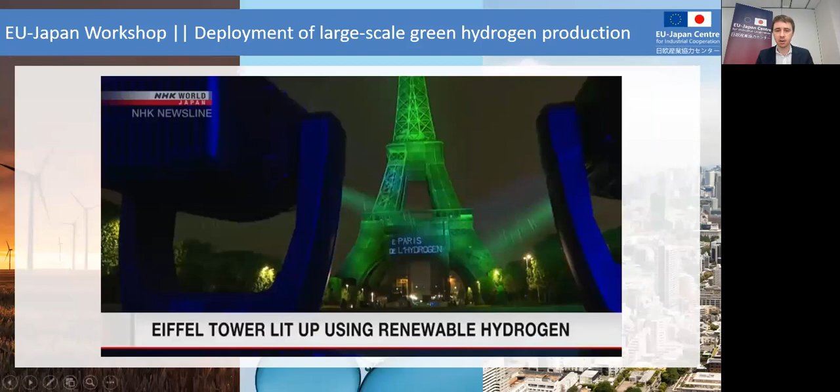Our topic today is definitely a hot topic. This week in Paris, the Eiffel Tower was illuminated in green, using electricity produced from renewable hydrogen provided by Air Liquide. And last week in Shizuoka Prefecture in Japan, a hydrogen-powered car developed by Toyota joined a 24-hour endurance race on Fuji Speedway. These two recent symbolic performances illustrate the importance that both Europe and Japan give to hydrogen on their pathway towards carbon neutrality.

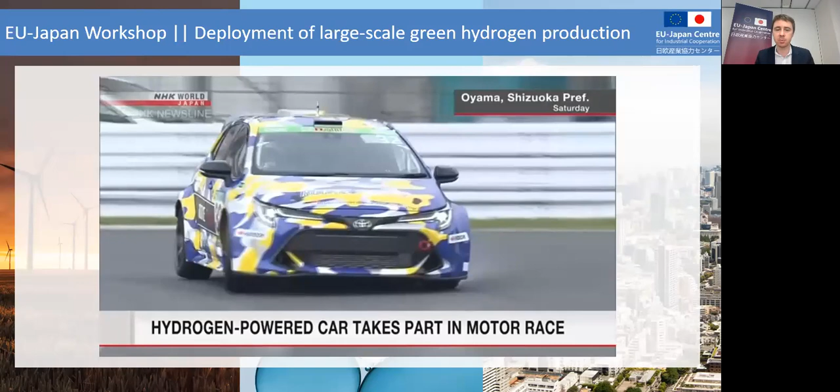They also show that hydrogen is no longer a confidential topic discussed only between experts. It's now getting out to reach the general public. As you know, hydrogen can be produced from many sources of energy. Today, 95% of the hydrogen in the world is produced from fossil sources. In our workshop today, we focus on the production of green hydrogen from renewable sources.

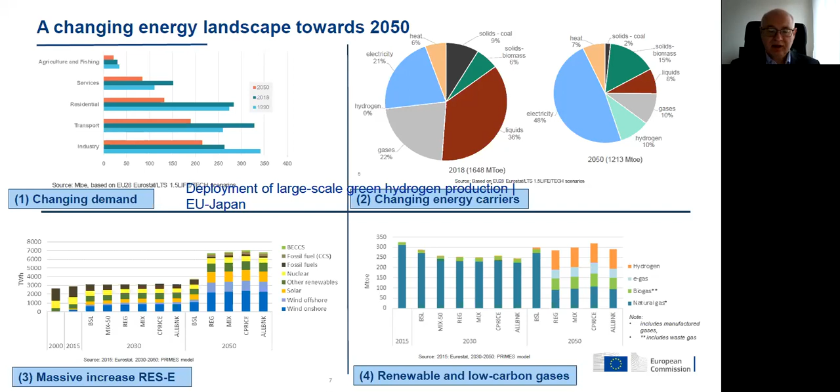Hydrogen will also be key in securing sector integration, but also, in the first instance, in securing large-scale storage of renewables. So it's a key priority, and our analysis makes clear that hydrogen and electrochemical storage will de facto become the main solutions for the future. We still have pumped hydro and will continue to in Europe, as capacities are limited, so gradually chemical and electrochemical batteries and hydrogen will play a growing role.

In some of the scenarios, hydrogen will play the most important role, and will need to move towards hundreds of gigawatts of installed capacity, both for storage and for securing the electricity grid, while at the same time delivering decarbonization services to other parts of the economy.

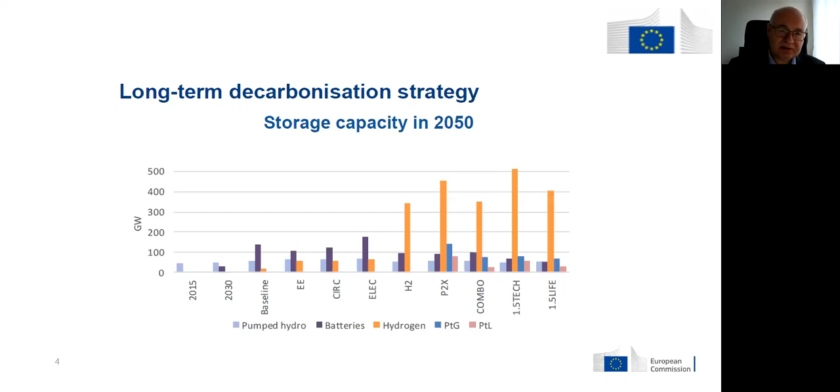In this context, we came in support of the implementation of the Green Deal objectives with the concept of energy system integration, a strategy last year followed by the hydrogen strategy, which includes an investment agenda, and looks at how to boost demand and scale up production, to develop hydrogen infrastructure.

We also looked at research and innovation. At the international dimension, the Hydrogen Alliance came at the same time, bringing many actors together to succeed in the implementation of these efforts. I will try to be quick on those.

What is important to bear in mind for all participants, also those not from Europe: we have concrete targets for 2024 of 6 gigawatts of renewable hydrogen production through electrolyzers, 40 gigawatts by 2030, and the strategy also acknowledges potential for another 40 gigawatts in the neighborhood of Europe.

So the aim is, towards 2050, to really scale up and decarbonize all sectors, making a place also for synthetic fuels. In this journey, we need first of all to replace the existing hydrogen production, which currently, as we all know, is 95% fossil fuel based without any CCS.

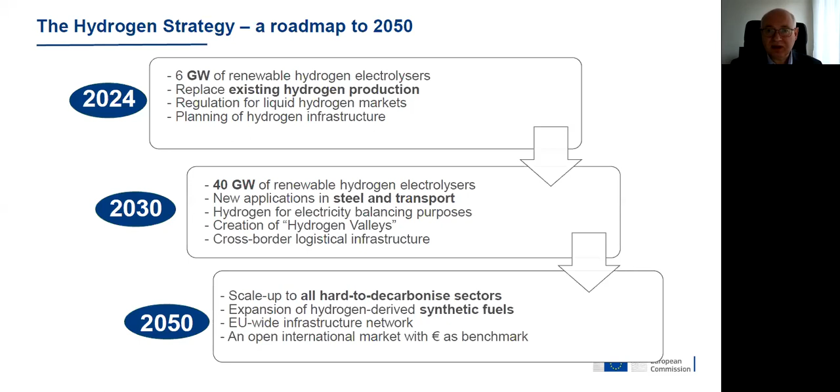But gradually we need more and more renewable capacities installed, and renewable hydrogen in particular to support heavy duty transport, to support the steel industry becoming green steel, and also to launch more and more hydrogen valleys across Europe, what we have started in Europe, to become a norm and support decarbonization everywhere.

Next slide, please. But as I said, it's very much an investment agenda.

You see that to invest 24 to 42 billion euros in electrolyzers needs to be accompanied, for the 40 gigawatts by 2030, by an additional 80 to 120 gigawatts of renewables, for which we need to invest 220 to 340 billion euros. All this is very important to drive economic recovery and modernization of the economy, and a more sustainable economy towards 2050. This is, I think, essential.

And the work has to be done also on the end-use sectors and on the infrastructure, whether transport or storage of hydrogen as well.

Therefore, we have launched the Alliance, and the Alliance has the objective of defining project pipelines for hydrogen in Europe. There are more than 1,000 stakeholders involved, and 6 round tables covering the whole value chain, from energy production, transport and distribution, mobility, buildings, industrial applications. The first project pipeline will be communicated at the forum on 17-18 of June.

We work with all the industries in this, and on the concept of partnership we have developed initially in research and innovation in the joint undertaking with Hydrogen Europe, but extended to all, and Jörg will tell you more about this, expanded afterwards to all the sectors and actors contributing to the value chain for hydrogen for the economy. And to materialize this, we have a number of actions and key tools.

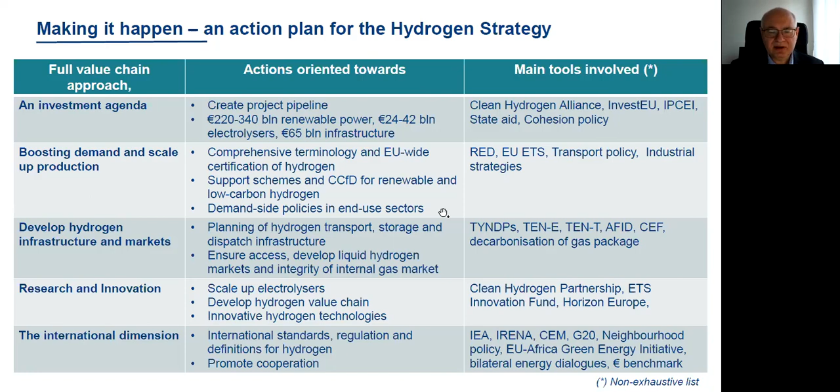The international dimension is key. It's not only about standards and regulations, but also promoting cooperation. Here, next slide, I will refer a bit more on this. It's clear we have a structured dialogue with all the OECD and developing countries, and Japan is the very best example, I could say, in this area.

We need research and demonstration to continue, and there's a mission innovation here with the concept of hydrogen valleys and the platform being launched. The International Partnership for Hydrogen Economy on codes and standards, but not only—we are working now, also together with Japan, in a multilateral context as well, for the methodologies for greenhouse gas emission calculations, because if we want to develop global markets and trade in hydrogen, we need to know what we count.

And how we measure and quantify renewable and low carbon hydrogen. The Clean Energy Ministerial Hydrogen Initiative is also an area in which, again, we cooperate also with Japan, but not only with Netherlands, with the United States and Canada. And we will launch next week, and very happy to announce that we'll launch a Global Ports Coalition on this occasion.

So again, the Eastern Partnership and the Southern Partnership and the Green Energy Initiative with Africa are very important, both for investment perspective and for the investment partnership we want to develop with all these regions and countries, but also to support them in tapping the potential for renewables and for renewable hydrogen production and use, but also export in global markets and to Europe.

So with this as an introduction, I thank you very much, and back to you and to Toshi.

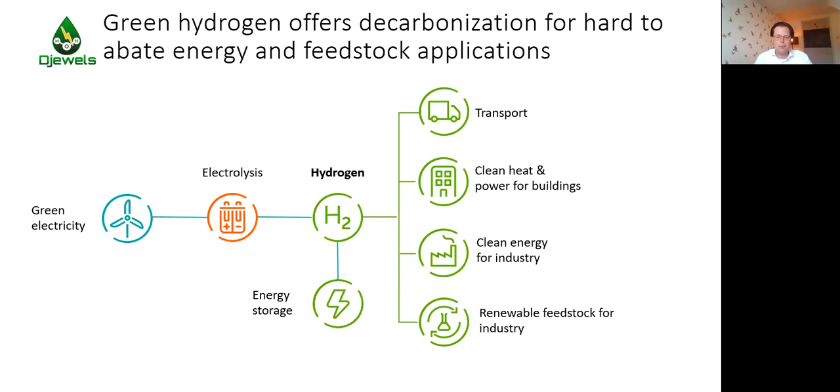Now, obviously, green hydrogen, as you all are aware, offers great opportunities for this decarbonization, especially in the hard-to-abate energy and feedstock applications. We have focused really on the electrolysis and the renewable feedstock, as we see the industry, particularly the chemical industry, as the starting point to reach scale, because scale is what we all need to bring costs down.

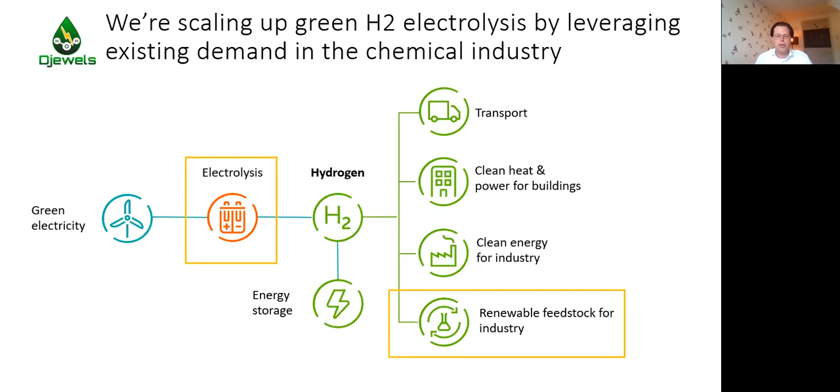That's why Nobian, together with partners mentioned on this slide, set up the Djewels project, really to go set a complete value chain from renewable power up to renewable methanol. And we have all the partners included in the project really to make this first step happen.

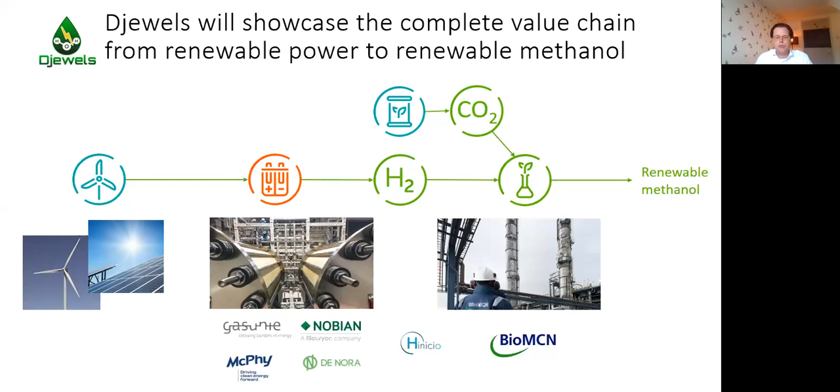Because with Djewels, we set a very important first step. It is a 20 megawatt water electrolyzer, which is not yet at the scale that we want to be, but it's very important because this is the scale where you move out of containerized solutions and you move into industrial scale factory type solutions. We use state-of-the-art high current density pressurized alkaline technology, really a next step in technology to further bring costs down and enable further scale up.

We work together with the Dutch gas transport system operator Gasunie, with chemical company OCI BioMCN, Groningen Seaports, the local harbor authority that will support on infrastructure, McPhy and De Nora, European technology providers, and Hinicio, that is supporting on the certification of the hydrogen.

So really making sure, together with our partners, that we take the renewable attributes from the renewable power into the product of our customer, OCI BioMCN. We have much support, as mentioned, to not only bring this first project on the ground, but also enable the lessons dissemination from this project to help further scale up.

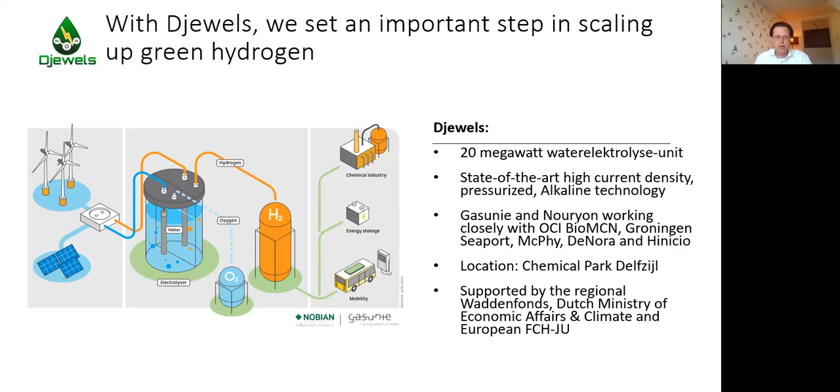We are located in the chemical park Delfzijl, and it's an important location because while we only start with 20 megawatt, the potential of demand in this chemical park is over 1 gigawatt. So we are able to scale up here.

I think a nice add-on to share in this European-Japan cooperation is mentioning that we operate already a 30 megawatt chlor-alkali production, which is using Asahi Kasei technology. And actually, recently, together with a partner, Asahi Kasei, we introduced the newest generation of membranes into this facility. So I think also a showcase of European-Japanese cooperation we actually implement in Delfzijl. But the potential of just the chemical park Delfzijl is already above 1 gigawatt.

And that's also what we're trying to leverage in this from Djewels. While we get the leverage, while we get the scale of electrolysis, green hydrogen production from the chemical industry, we leverage that scale for multiple applications, both in mobility, household applications such as heating, and transportation, and also use it for energy storage.

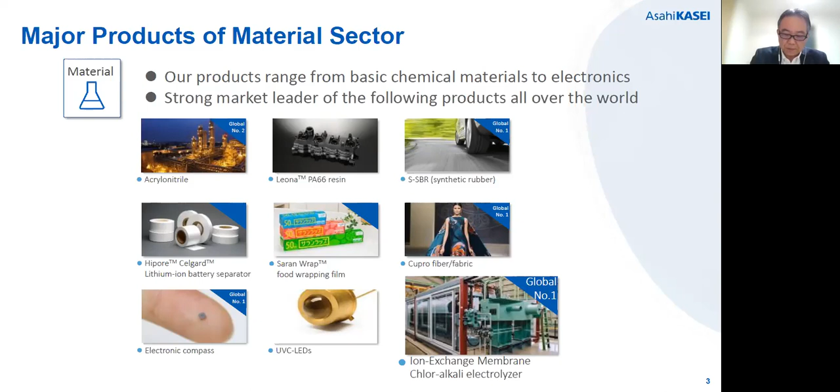This shows the major products in our materials sector. We have chemical materials up to electronics, and a wide range of products including monomer, polymer, films, fibers, and semiconductors. On the right-hand side, we are the global number 1 chlor-alkali electrolyzer, and we also operate in the ion exchange membrane business.

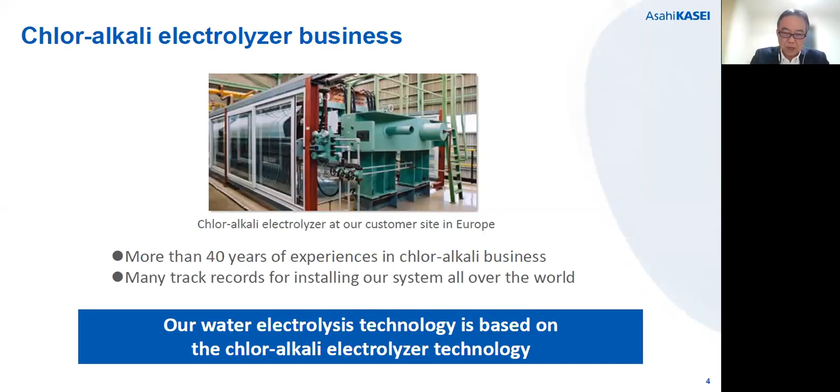This shows the specific chlor-alkali electrolyzer business. The photo shows the electrolyzer set at a European customer. Using this technology, in 1975 we started this business focusing on chlor-alkali electrolyzer. Over 40 years we have gained experience, and we are still running this business based on that experience. We have many customers and an actual track record. This water electrolyzer is really based on this original chlor-alkali electrolyzer.

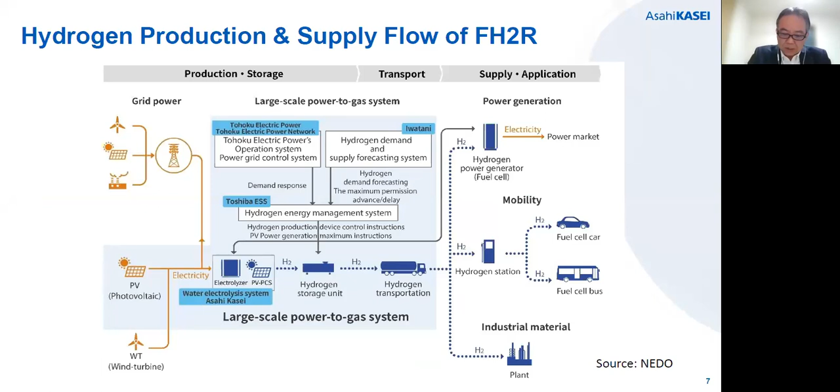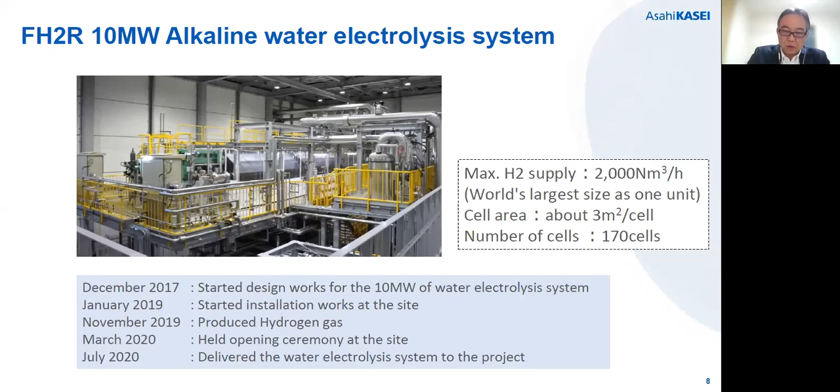This is the 10 megawatt alkaline water electrolysis system set up in the FH2R project. The biggest supply will be 2,000 normal cubic meters per hour. The cell area is about 3 square meters per cell, and the number of cells is 170. We are actually evaluating this equipment.

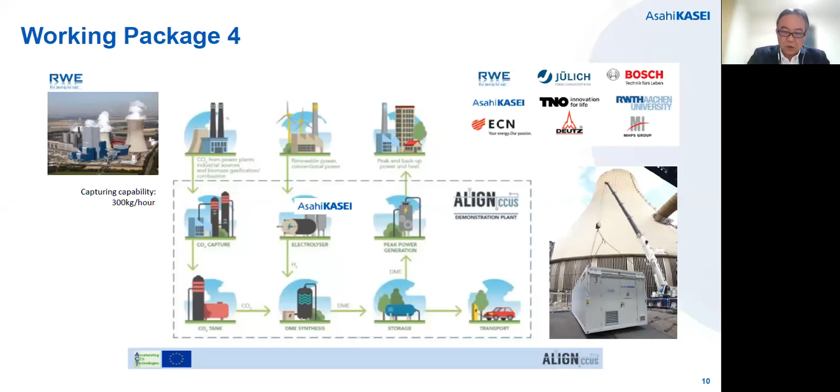This is the detail of work package 4. From power generation, CO2 will be collected. We use a water electrolyzer to synthesize H2, and we react this with CO2 so that we can produce OME, which can be utilized as fuel. This can be used for transportation and further power generation. By doing this, we'll be able to contribute to reducing CO2 emissions.

Lastly, this is how we plan to contribute to sustainable society. Since we are a chemical company, we would like to convert hydrogen into green chemicals. A water electrolyzer can be used to generate hydrogen, and this hydrogen can be converted to ammonia or methanol, possibly utilizing CCU in this process. By converting hydrogen to different materials, we can apply them to fertilizers, specialty chemicals and fuels, synthetic rubber, plastic, fiber and textiles, and coating materials. There are all these different kinds of applications possible. With this vision, we want to contribute to a sustainable society, a sustainable world.

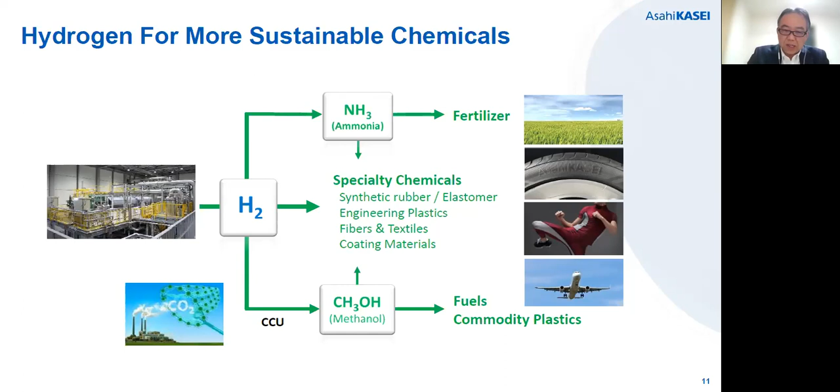Thank you very much. I'm very pleased to hear all that, and this shows also already the potential of collaboration between European and Japanese companies.

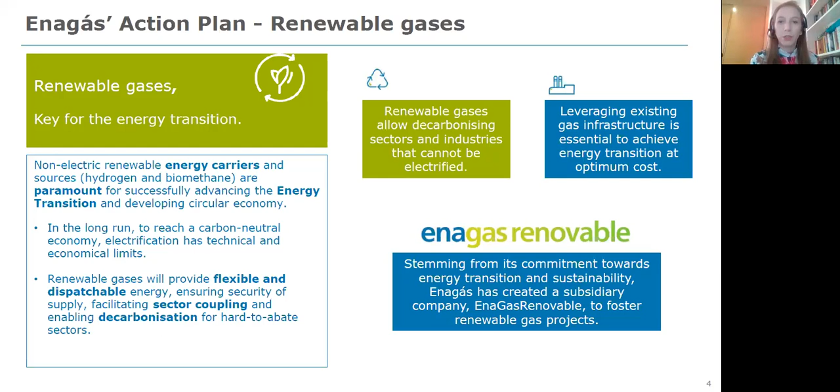According to this strong commitment that Enagás has with decarbonization and the energy transition, we have created a subsidiary company, called Enagás Renewable, to foster and boost these renewable gas projects. Next slide, please.

This Enagás Renewable company is boosting renewable gas projects, mainly focused on hydrogen and biomethane. From the point of view of hydrogen, we are mainly interested in green hydrogen production by renewable energy sources—photovoltaic, wind, onshore, offshore, etc. In our projects, we usually include several end uses of this green hydrogen: mobility, producing electricity for industry as feedstock, and of course for energy use, not only electricity but also heat, and for the residential and commercial sector.

Related to biomethane, we are more focused on the upgrading stage. From biogas, we participate in projects upgrading this biogas in order to obtain biomethane, which we then inject into the natural gas grid and use to move natural gas through the network. Next slide, please.

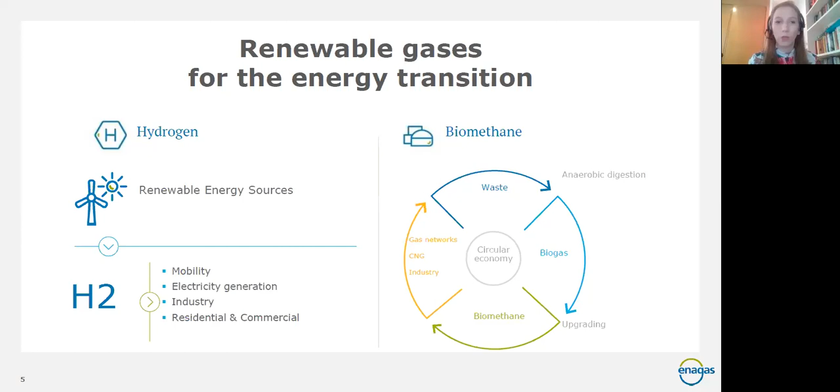Which kind of projects do we develop regarding these renewable gases? I am going to focus on hydrogen because I think that is today's topic. We are promoting large-scale projects for the decarbonization of economic sectors, focused on regions impaired by the energy transition, and we are retrofitting and upscaling the national gas network, blending with natural gas, as well as developing dedicated hydrogen backbones towards Europe. In that sense, we are promoting the IPCEI Green Crane, which I will explain a little in the following slides.

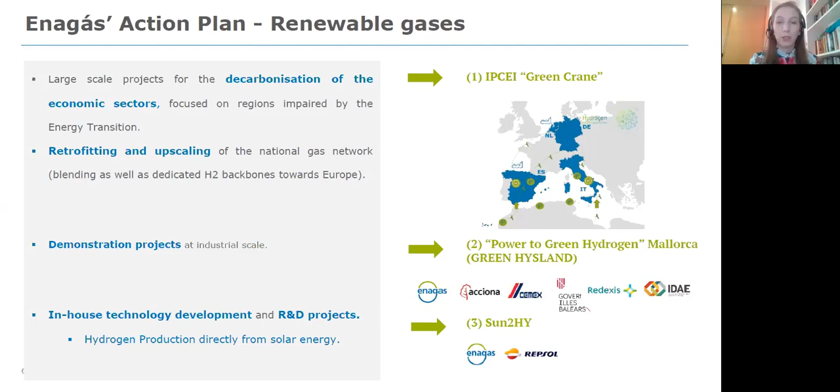The second kind of projects we develop are demonstration projects at industrial scale. We are talking about, for example, the project Green Hysland, which I am going to talk about a little bit later on. And of course, we are developing R&D projects in order to develop in-house technology deployment related to hydrogen. For example, we are developing sun-to-hydrogen projects, in which we develop technology to produce hydrogen directly from solar energy through photo-electrocatalysis. Next slide, please.

Related to the first project I mentioned is the hydrogen IPCEI Green Crane initiative. IPCEI stands for Important Project of Common European Interest. In that sense, we are developing the Green Crane initiative. It's not a single project; it's an umbrella which includes several projects.

As you see in the picture, there are 3 routes. The idea is to develop south to north green hydrogen routes. We are working with partners in other countries to connect competitive green hydrogen with demand centers. The idea is to pave the way for future European cross-border and import routes. We would like to boost local hydrogen demand in regional hubs, and the final goal is to decarbonize end-use sectors with this green hydrogen.

Here you have more information about this green hydrogen IPCEI Green Crane initiative. The western route is led by Enagás. There are more than 65 partners involved in this initiative. In the past, it was called Green Spider. In this western route, we are going to invest up to 6 billion euros. The goal is to produce 3.3 gigawatts of new renewable energies and 1 gigawatt of green hydrogen, which we will use in different sectors, including industry, refineries, steel, e-fuels, and the chemical industry.

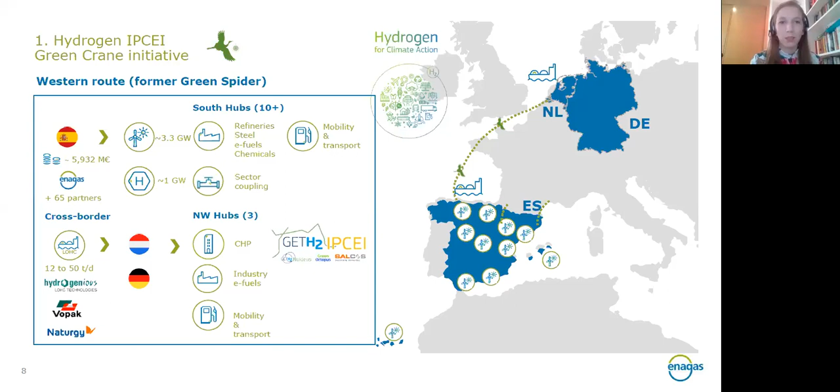Focusing on Spain, here are the hubs that have already been announced, although we are working on the development of hydrogen projects in almost all regions in Spain. Hub number 1, which is Mallorca, will be discussed later. All of them include the production of green hydrogen from renewable energies and the use of this hydrogen in multiple applications, such as industry, mobility, and grid injections.

Here you have 8 examples of the hubs that have been announced. But as I mentioned before, we are really working on several projects in almost every region in Spain.

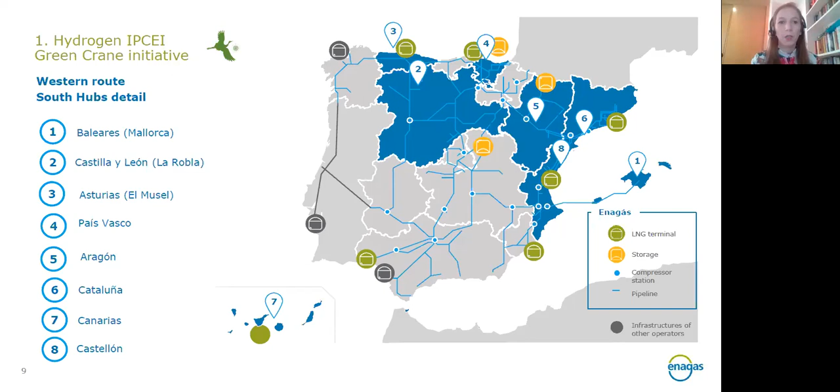Just some information about the R&D project I mentioned before, which is the Sun to Hy project. The idea is that solar radiation is converted directly into hydrogen without external electricity, meaning low cost materials and high availability. We will increase efficiency and reduce cost compared with the traditional PV electrolyzer plant.

Next is the project Green Hysland, a European project funded by the Fuel Cell and Hydrogen Joint Undertaking. We signed the grant agreement in December 2020, and it's a 5-year project. The idea is to develop a hydrogen ecosystem on the island of Mallorca, in the Balearic Islands, using this green hydrogen for multiple applications.

How this project started: in December 2018, CEMEX, one of the partners promoting this project and active in the industrial cement sector, announced the closure of its cement production plant located in Lloseta, Mallorca. From that moment, work began on defining projects that would allow the reindustrialization of its activity in Mallorca. This is part of an agreement between the Spanish Ministry of Industry, Trade and Tourism, the Balearic government, and companies represented here: Enagás, Acciona, CEMEX, and Redexis, in order to reindustrialize Lloseta.

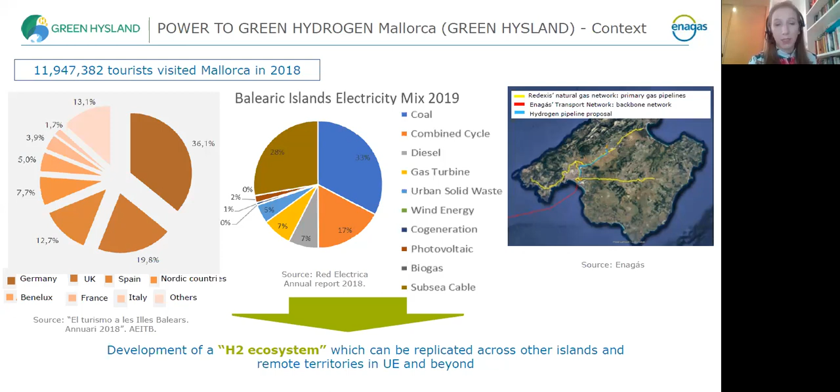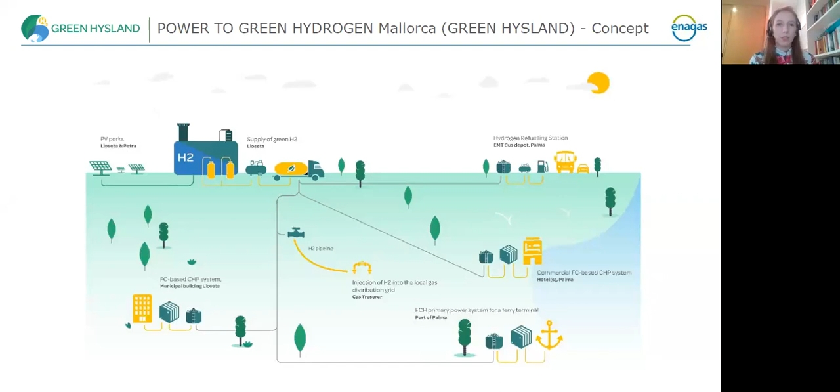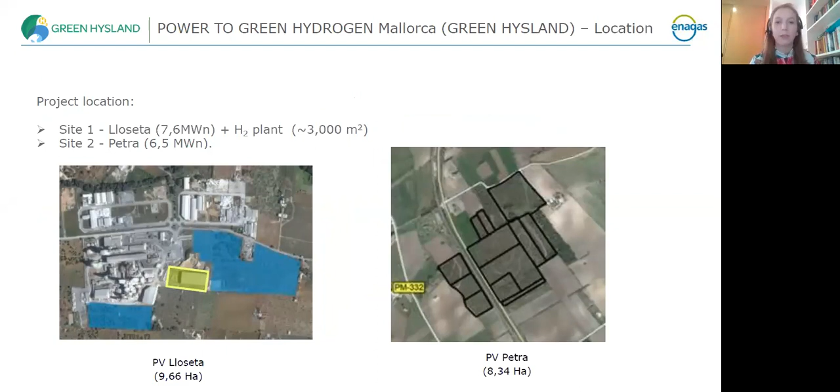Next slide, please. Here's an example of the location within the CEMEX land. In yellow, you can see the hydrogen production plant, and in blue, on the left is the PV Lloseta plant and on the right the PV Petra plant. We are going to develop two PV plants to obtain green electricity for the hydrogen production.

Next slide, please. What are the key figures of the project? By the end of the project, we hope to avoid more than 21,000 tons per year of emissions. We are going to develop new direct and indirect employment ecosystems associated with hydrogen, and a sustainable large-scale island-based hydrogen hub. This is very important for us — we are not looking for small projects to prove the concept, because we think the concept is already justified and proved. We would like to develop sustainable and scalable hydrogen ecosystems in Spain, throughout Europe, and throughout the world.

Inside the project, we are also going to develop a long-term roadmap to lay the path for the local and regional-based economy towards 2050. There are 5 partners who will help us replicate this ecosystem in their own territories, and the total investment is about 50 million euros. Next slide, please.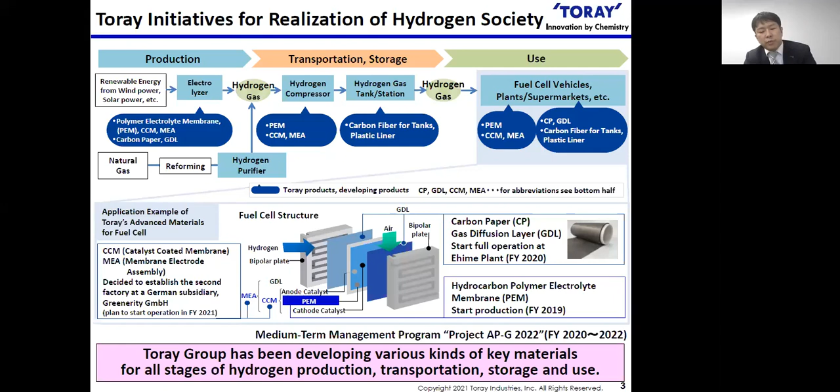Here is our German subsidiary company Greenerity's initiative in the power-to-gas megawatt class PEM electrolyzer demonstration project in EU. Toray acquired Greenerity, a former SolviCore, in 2015, based in Hanau-Alzenau near Frankfurt, Germany. Toray Group's Greenerity has been leading the demonstration project of the world's most compact megawatt class PEM electrolyzer stack since 2015 in Hamburg, Reitbrook, based on Greenerity's CCM technologies. Today, Toray Group has promoted the initiative toward the realization of hydrogen society from early on for the proceeding EU market as for the electrolyzer and green hydrogen production.

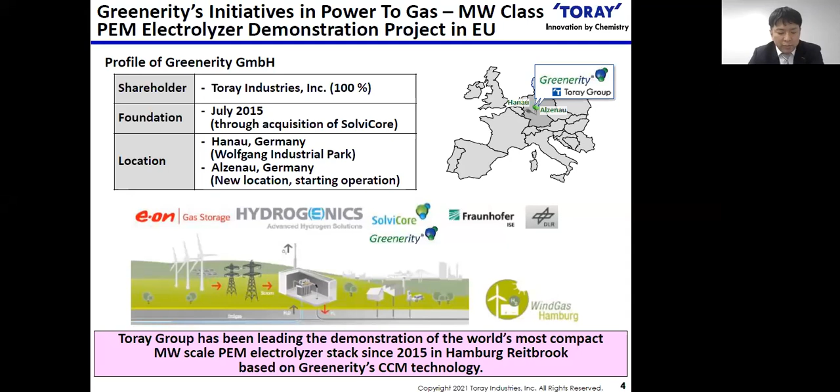Here is the principle of PEM electrochemical devices, including the electrolyzer, hydrogen compressor, and fuel cell. As you may know, all devices have almost the same cell configuration, including the PEM, catalyst, and GDL. Membrane and MEA is the common key material for fuel cell, compressor, and electrolyzer.

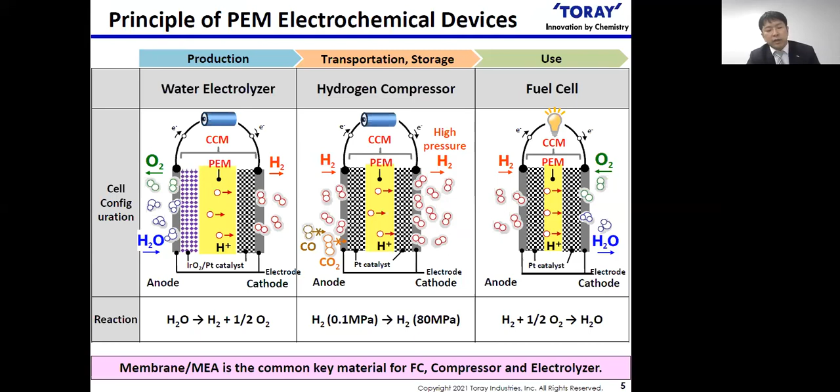This slide shows Japan's green growth strategy through achieving carbon neutrality in 2050, published by METI. As we discussed in the Japan Hydrogen Fuel Cell Strategy Council, in order to reduce CO2 emissions, not only renewable equalization and expansion, but also green hydrogen utilization in non-electricity, so-called sector coupling, would be of essential importance. Therefore, we consider that green hydrogen production by electrolyzer is a kind of core technology toward carbon neutrality.

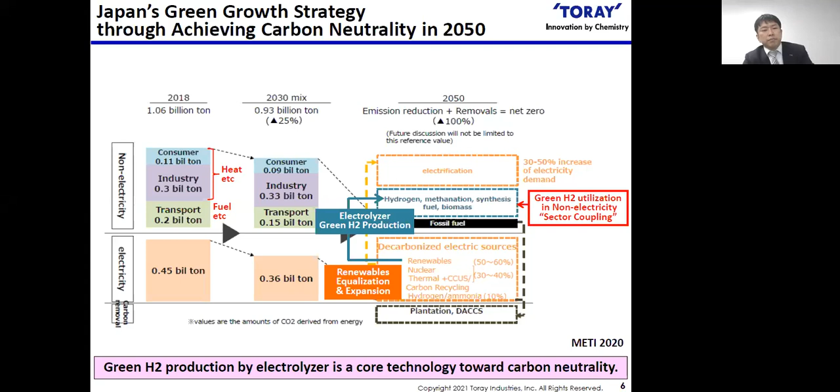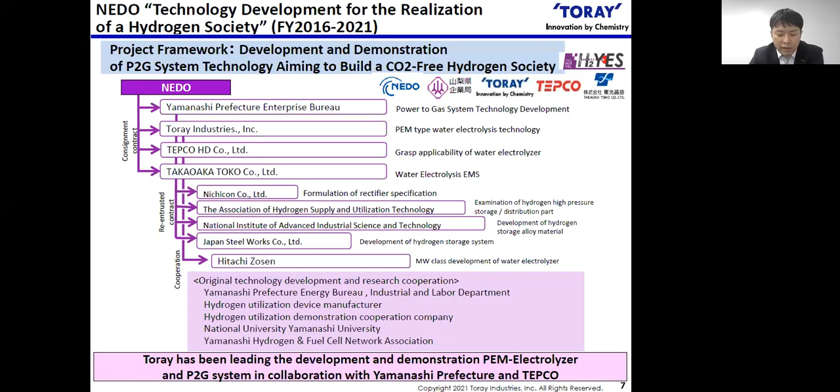This is the NEDO project framework, development and demonstration of P2G system technology, aiming to build a CO2-free hydrogen society since 2016. After Toray's joint project on electrolyzer R&D, Toray has been leading the development and demonstration of PEM electrolyzer and P2G system in collaboration with Yamanashi Prefecture and TEPCO, Tokyo Electric Power Company, in Japan as well.

This is the overview of the Yamanashi NEDO P2G project. We are promoting consistent demonstration projects from green hydrogen production to utilization in the real hydrogen society of Yamanashi Prefecture, including the hydrogen boiler for the semiconductor factory, as well as a stationary P2G for the supermarket. In this project, Toray has been leading the development and demonstration of Japan's first megawatt class PEM electrolyzer in collaboration with Hitachi Zosen.

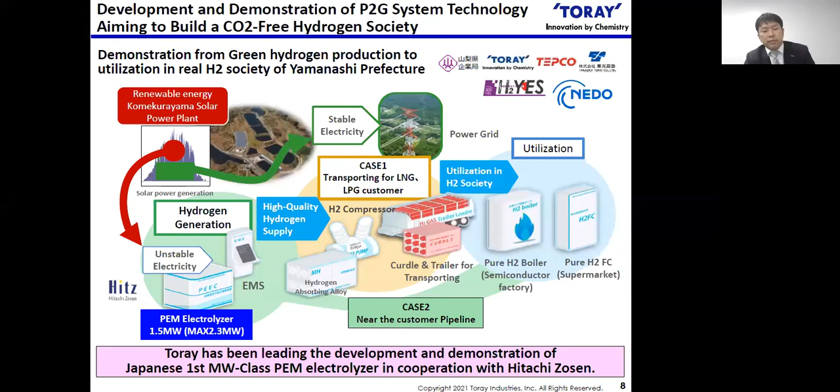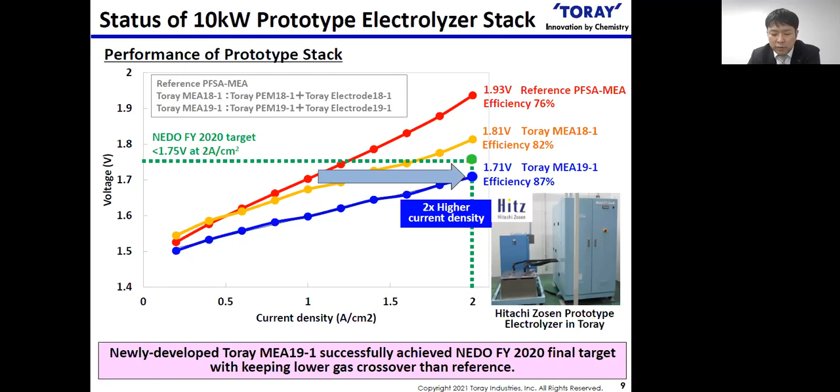This is the development status of the 10 kilowatt Hitachi Zosen prototype electrolyzer stack, which was installed in the Toray Shiga plant. As you can see here, newly developed Toray MEA, shown as the blue line, successfully achieved the fiscal year 2020 final target shown in green, while keeping lower gas crossover than the PFSA reference. In comparison with the reference PFSA MEA as the red line, Toray MEA 19-1 achieved twice higher current density at the same voltage, which will be able to contribute to higher efficiency system and cost reduction of stack system and green hydrogen.

This is the field demonstration status of a large area prototype electrolyzer stack in Komekurayama, Yamanashi Prefecture. Based on the Toray membrane MEA technology shown in the previous slide, Toray has been promoting the development and demonstration of a large area prototype PEM electrolyzer stack in cooperation with Hitachi Zosen.

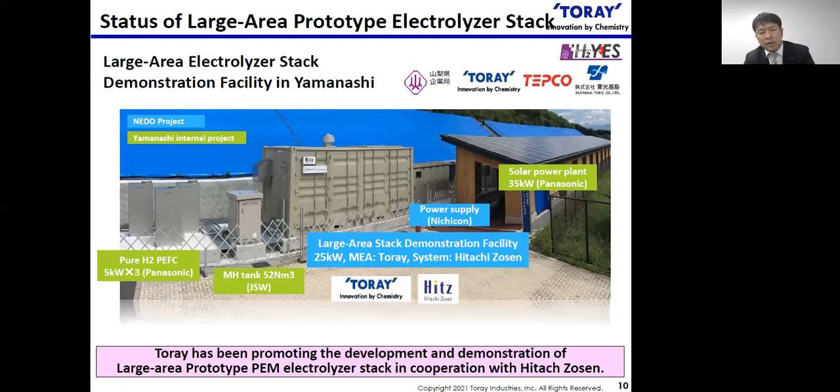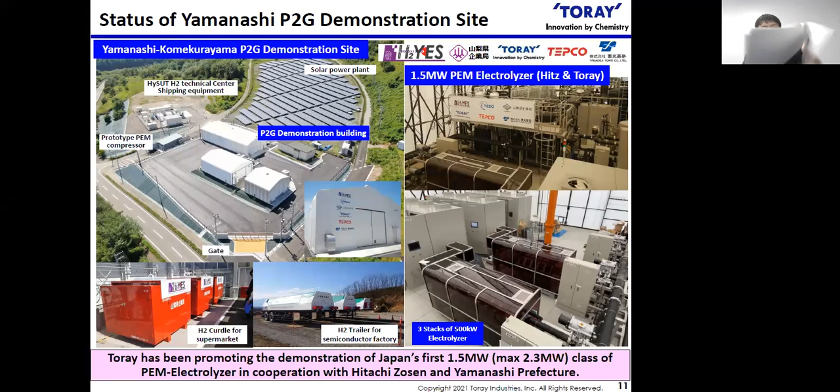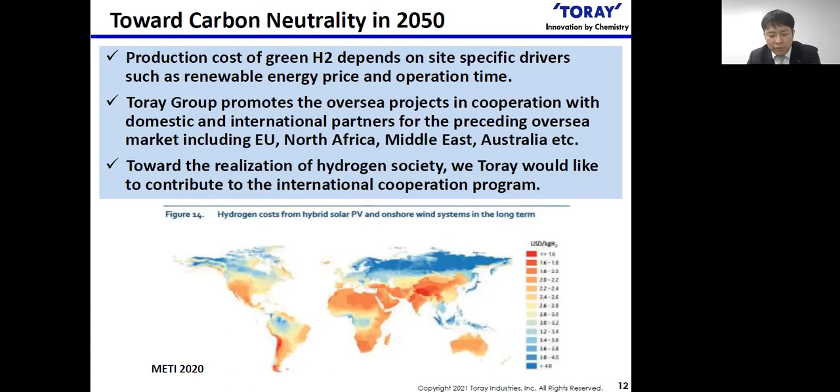There was a question for you, if you plan to utilize steam electrolysis, or PEM electrolyzer.

Okay, I think we are a bit running out of time, but this panel was very interesting and very relevant. I should point out that indeed the hydrogen strategy in Europe is very clearly focused on renewable hydrogen, so the carbon footprint is important. The taxonomy will play an important role in steering, and the levels agreed there will play a very important role in steering investments and public support in hydrogen and renewable hydrogen projects.

So this alliance will also pay due attention to the project pipelines which will support the hydrogen strategy implementation. There are already good examples of cooperation with Japan.

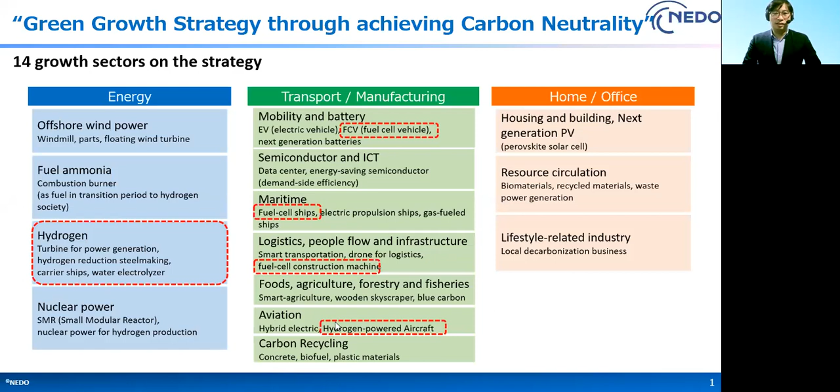Okay, next I will talk about current activity in hydrogen fuel cell. We conducted several projects from hydrogen production, transportation, storage, and utilization, basic research, applied research, demonstration, etc. Today I will bring some information about our direction.

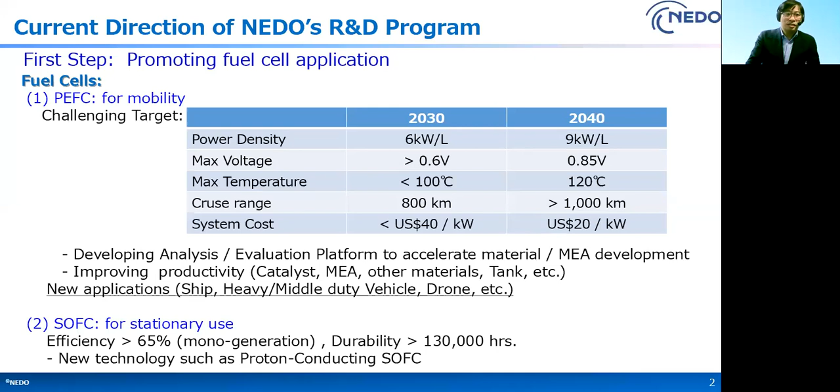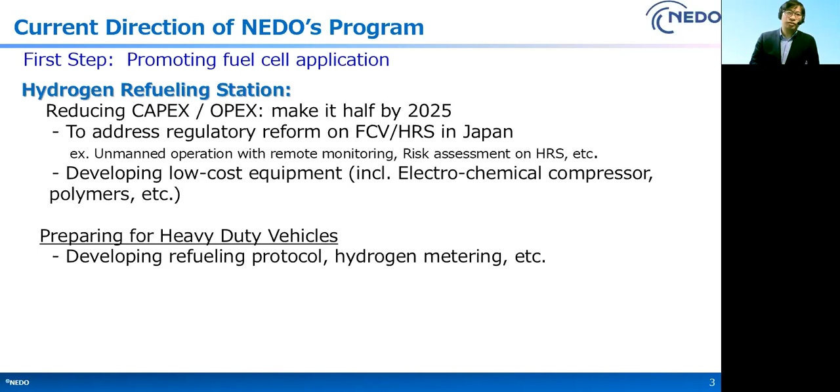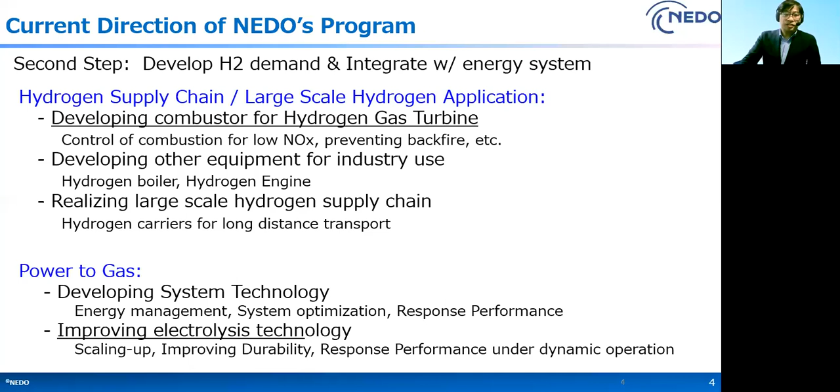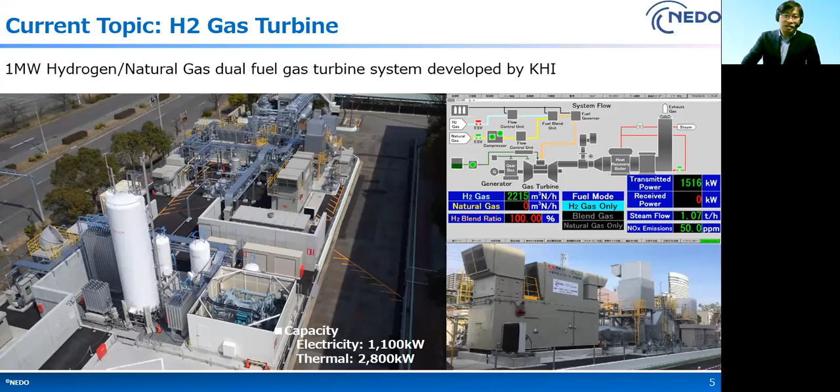We are now running over 3 years, and we already succeeded in 100% hydrogen operation. Our next challenge is improving the efficiency of the gas turbines.

As I mentioned, we are conducting two types of hydrogen carrier. One is liquefied hydrogen, and we already developed the world's smallest but world's first hydrogen tanker, shown in the photo on your left.

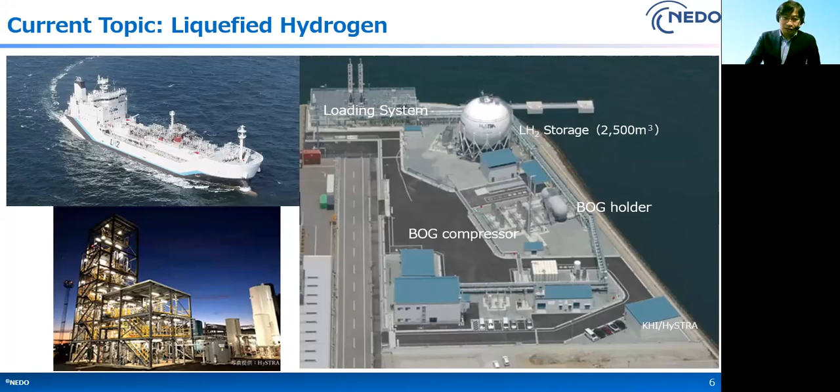We are also developing liquefied hydrogen handling equipment at the port, like a loading and unloading system and large-scale hydrogen storage. The demonstration will start this year.

As my colleagues from Asahi Kasei and Toray explained, we are also conducting a megawatt-scale power-to-gas project in Japan. Both of the two demonstration projects have already started.

The total system is already installed, and we are now conducting the demonstration project. The challenge is not only developing large-scale water electrolysis, but also developing a total energy management system.

We need to develop the kind of experience gained through this demonstration project. At the real site, the experience is very important for the next development.

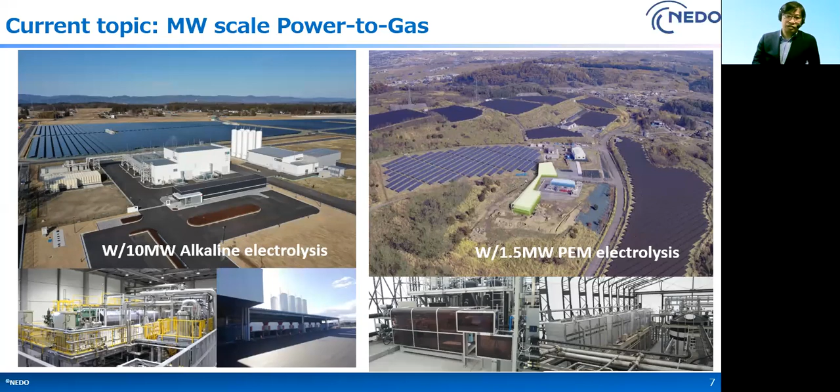We also conducted a similar feasibility study for developing a hydrogen utilization model. This slide shows one of the feasibility studies at a port, for electrification and promoting decarbonization at ports.

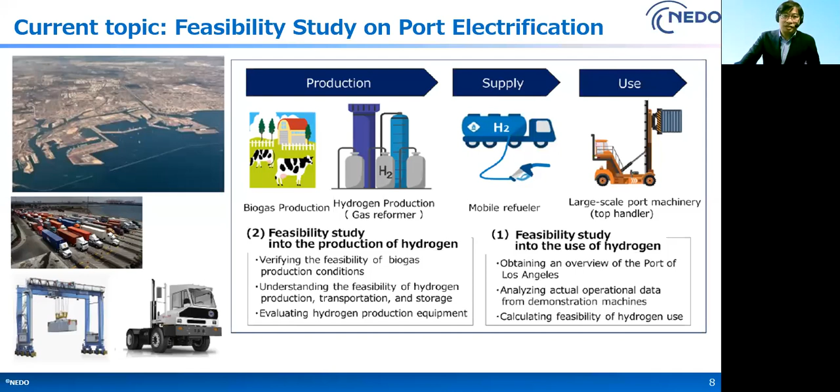This is a collaboration with Los Angeles Port. There are many facilities running on diesel engines, and we try to find the possibility to transition from diesel equipment to fuel cell or hydrogen fuel cell equipment. We also need to find the possibility to provide green hydrogen from biomass or electricity.

Finally, I'd like to mention the potential for cooperation. This is just an idea, not decided yet. There are so many items that could be collaborated on.

One is hydrogen production, mainly focused on water electrolysis. For example, fundamental research for evaluating the performance of water electrolysis, researching the reaction mechanism inside the water electrolysis, working toward improving the technology.

For next generation water electrolysis, there is potential in anion exchange membrane or solid oxide electrolysis. And hydrogen utilization, as I mentioned, the refueling for heavy-duty vehicles is very important not only for Japan but also for the EU and the United States. It's a good chance to collaborate.

And also for analysis and modeling, this is also very important. We are now conducting several feasibility studies with hydrogen utilization modeling, similar to hydrogen valley studies. We have the chance to share our experiences.

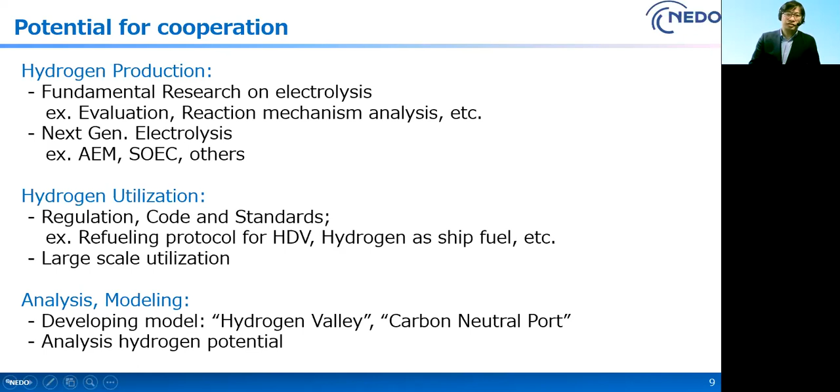Okay, and I'd like to close my presentation, and thank you very much for your attention.

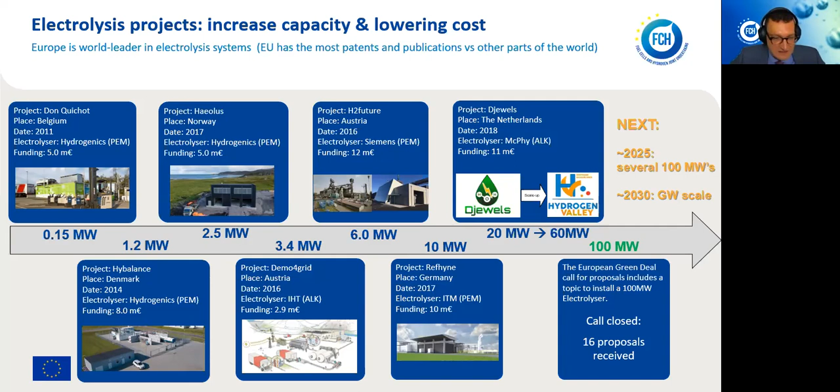Next slide, please. As I said, the H2 Future project - a bit of detail. This is about greening the steel industry. The hydrogen is, of course, green hydrogen, produced from hydropower in Austria - there's a lot of hydropower available there. Basically, it is used to green the steel.

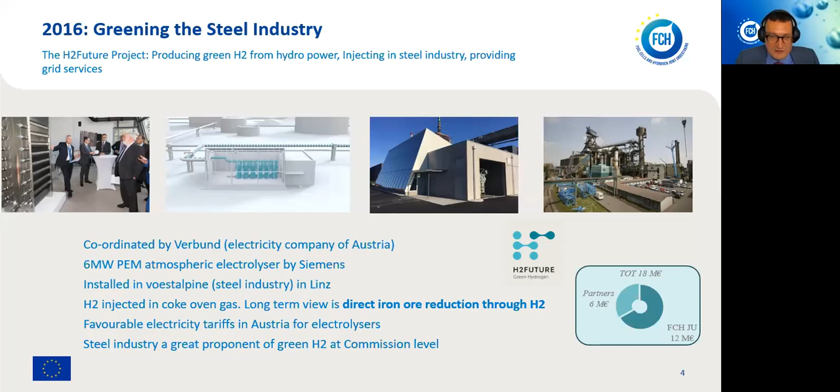Important is that Verbund, the electricity company of Austria, is really involved in this project. The electrolyzer itself, which is a PEM atmospheric electrolyzer, is 6 megawatts, provided by Siemens. It's installed in Voestalpine, one of the biggest steel makers in Europe, in Linz, Austria. The hydrogen is really injected into the coke oven gas, and they want to eventually do direct iron ore reduction through hydrogen in the long term. The total project was around 18 million euros, and we supported it with 12 million euros. Next slide - and it's working, it's completely operational already.

The next project is with Shell, the Refhyne project, to help green the refining industry. Here we will produce hydrogen from renewables, instead of using SMR hydrogen technology, which is, as you know, gray hydrogen. This is a 10 megawatt PEM electrolyzer by ITM, a UK company, installed in the Shell refinery in the Köln area in Germany. It's quite advanced - they get to 3 amperes per square centimeter, and it's operated at an increased pressure of 30 bar. The hydrogen will be used to inject into an existing pipeline, and also to do grid and load balancing services for the electricity grid. It will also be used for refueling hydrogen cars.

It's also used in their own processes for desulfurization of their fuels.

Maybe 10 megawatts sounds big, but actually it's very small because it will only replace 1% of the 100,000 tons that they need annually. So basically, if we really want to decarbonize this complete plant, they need to build 1 gigawatt of electrolyzers over there.

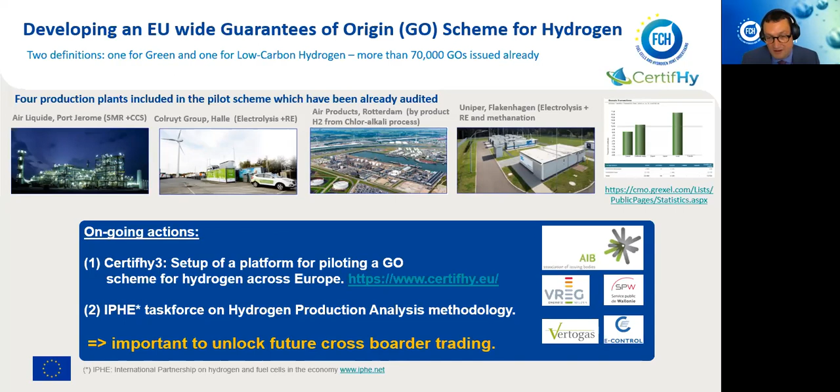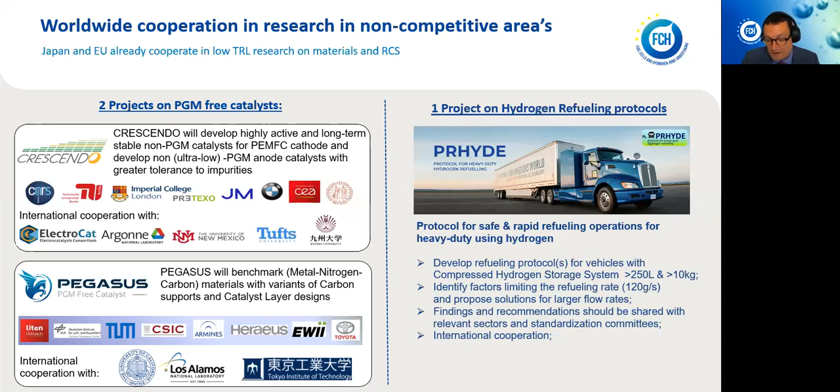Another one is the project PRHYDE, on hydrogen refueling protocols. There we have Toyota participating, because what we want to achieve is that worldwide we use the same hydrogen refueling protocol, the same way we do today with cars, and now we want to establish that for trucks. It's going very fine, it's going well. Also the US is participating in this one. Next slide.

Finally, like Ohira-san did, I'll also share a few ideas on possible cooperation areas. The first one is on the next generation HRS. We need to increase the reliability, the protocols that we do for refueling, and it's not only about trucks, but for the future also for shipping and aviation. So a lot of work is there to be done.

Also, see how we can, for example, make regulations for multiple use of a station. We already have, together with Japan and the US, an annual workshop on the hydrogen refueling station since 2014. Of course we will continue that and share experiences, but maybe we can also explore a joint research project. The other one is on the certification of hydrogen, and maybe green, blue - all these colors that we have worldwide on hydrogen.

So really to work on the CO2 footprint calculation methodology, we will continue to work with Japan and the IPHE, but also explore potential ideas for real import. Maybe Japan will import from Australia, we will import from other parts of the world, but maybe we can start certification of those imports using a common methodology.

The next idea is on hydrogen in ports. As Tudor already mentioned this morning, we will launch very soon, maybe next week, the Global Ports Hydrogen Coalition under the SEM initiative. It would be great to have also some Japanese ports in that initiative. The idea is together with all the ports worldwide to identify the potential of hydrogen in ports, but also the roadblocks for trade, and offer potential solutions to policymakers. So let's join the SEM for Japan ports and identify potential synergy projects.

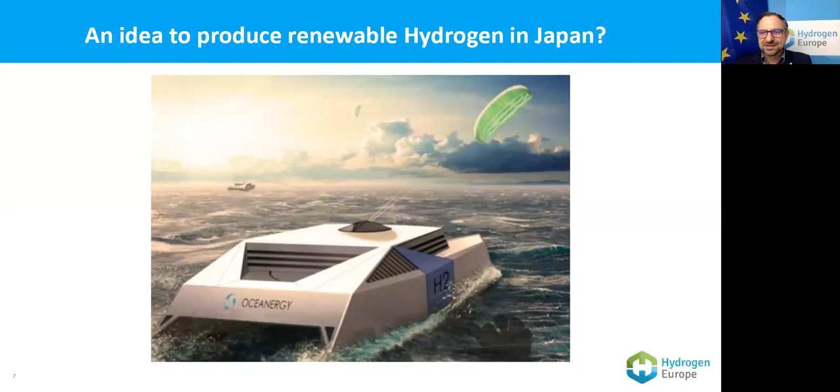Thanks very much for your attention.

Thank you very much, Mr. Jorgo, and thank you for introducing a lot of ongoing projects on industrial level, which are proof of a good bilateral relationship between the European Union and Japan. I also appreciate your ideas on the auctioning of hydrogen, or new ways of producing hydrogen. Actually, we are in a process to develop offshore wind resources also, which obviously will be a future option as a source of hydrogen.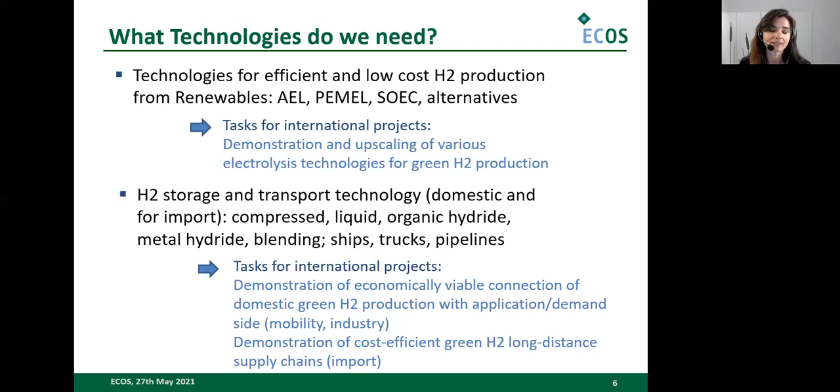And I think Japan has a lot of competence in this field. Next slide, please.

I would like to explain some important criteria from our point of view for international hydrogen projects. Firstly, the projects should address the key issues and bottleneck technologies, which are relevant for both sides involved and also for the development of hydrogen infrastructures worldwide.

And very important, the competences of both sides should be complementary, should match. This is always key for international projects to bring them to success. And finally, money is of course needed for demonstration projects. So what we need is three things: complementarity of interests, complementarity of technologies, and complementarity of funding schemes.

I think Japan is kind of advanced in developing the demand side, like mobility, and also for maritime long distance transports. On the other side, I see a lot of expertise and projects in domestic green hydrogen infrastructures and economies, and overall concepts for regional green hydrogen supply and use. Next slide, please.

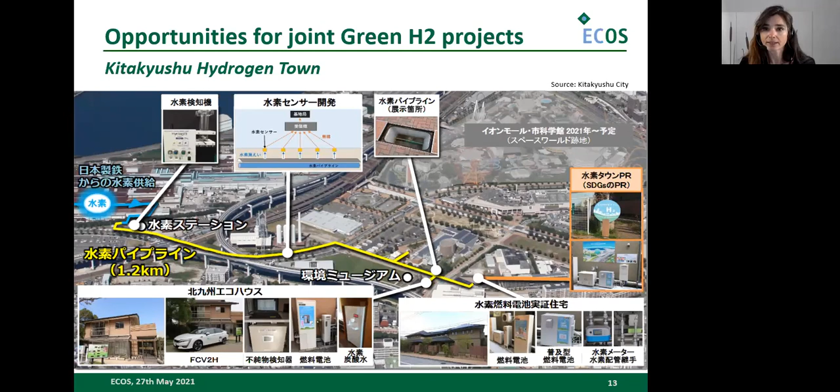Just 16 kilometers to the west, there's the first large-scale offshore wind farm project in Japan, the Hibiki-Nada offshore wind farm, which is supported by NEDO. The plan is to start installing bottom-fixed offshore wind power plants with a capacity of 220 megawatts and 6 megawatts of floating offshore wind power from next year on.

And as has been mentioned before, there's also scientific expertise. We have Kyushu University with the Hydrogenius department, and as we heard before, researchers from Europe are working there too. So the Kitakyushu and Fukuoka metropolitan area has, in my view, excellent preconditions for realizing a large-scale green hydrogen demonstration project along the entire value chain.

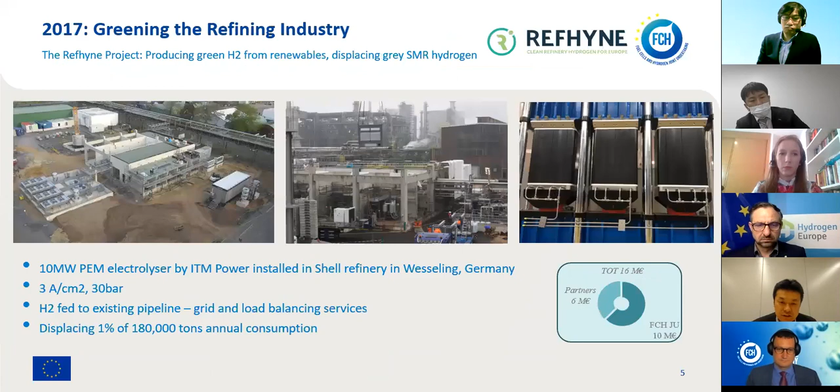But in any case, I'd like to center our discussion on the slides provided by Mr. Bart with regards to the possible areas for cooperation. So the Secretariat, can you show the last slides of Mr. Bart on the cooperation area? Yes, thank you very much. So of course this is not by any means an exhaustive list of areas for cooperation, but I'd like to start the discussion based on that.